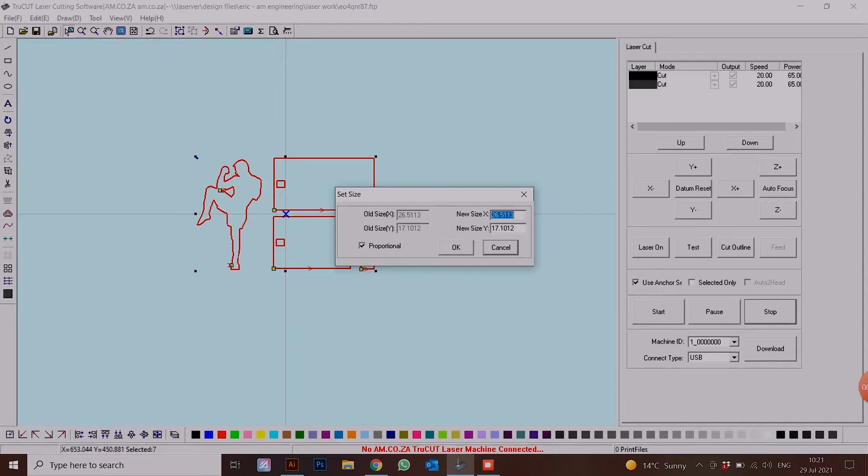Now since we changed the size of the whole thing, we need to check what the base plate size is going to be, to see if that's going to be big enough for us. X being 85 and our Y being 45, and we just got to keep in mind that our phone has to be smaller than the size of the stand we're cutting today.

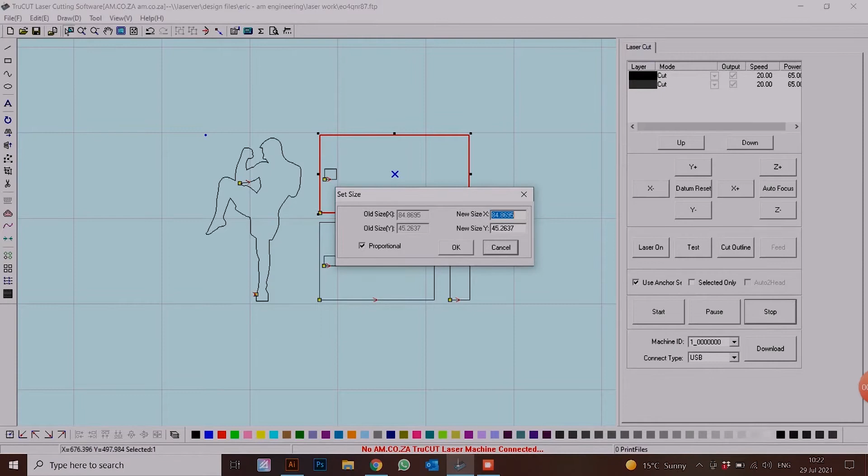I feel like 85 and 45 aren't going to be big enough, especially for my phone, so I'm going to make it bigger. Keep in mind you need to make it proportionately bigger, so I'll change the size to 80 instead of 85 wide. I feel like that will fit my phone better, just keep in mind to keep the size proportional.

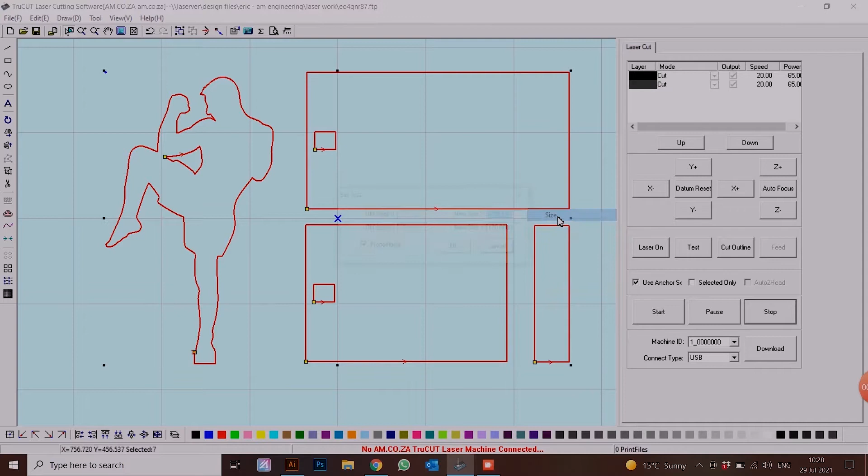Once I've seen the size that I need, I'm going to keep making the entire thing bigger until I get the size I'm looking for on the base plate, which I wanted 80 wide, and there we have it, just under 80, which will work perfectly fine.

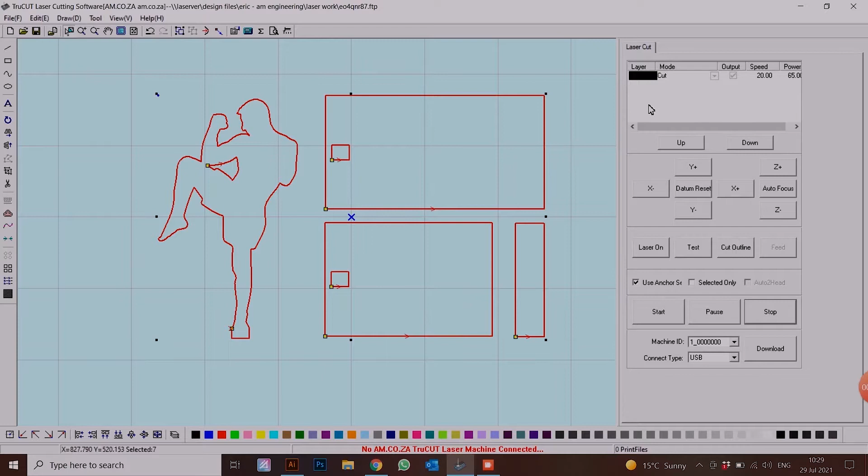From there we need to make sure we have all our layers selected, and our layers on the top right, as you can see there's two different colors, which is not what we need. We only need one color, so I'm going to select all of them to be black. So now it's all one layer.

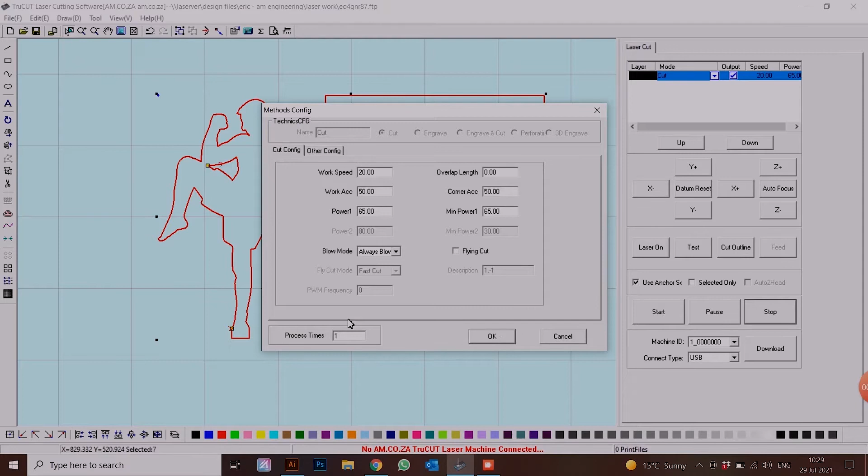From there we're going to be doing cutting, so I just want to make sure our speed is 20, which is perfectly fine for me. Our work accuracy stays 50 and my power stays 65. I'm using a 100-watt tube. Your settings may vary, you'll have to tinker with your settings. Once we've adjusted our settings and made sure our process is 1, we're going to say OK, and from there we are ready to go.

We can now select it again and either download it or start the job while it's connected to our cutter.

Now that the artwork's done and it's all set up, we can now go over to the cutter and start our job.

We're here at our laser, and now that we are here we can set up our media. We just need to do our head adjustment. Once we've done that, we're going to line up our head and then we can push start on our program. So let's get to it.

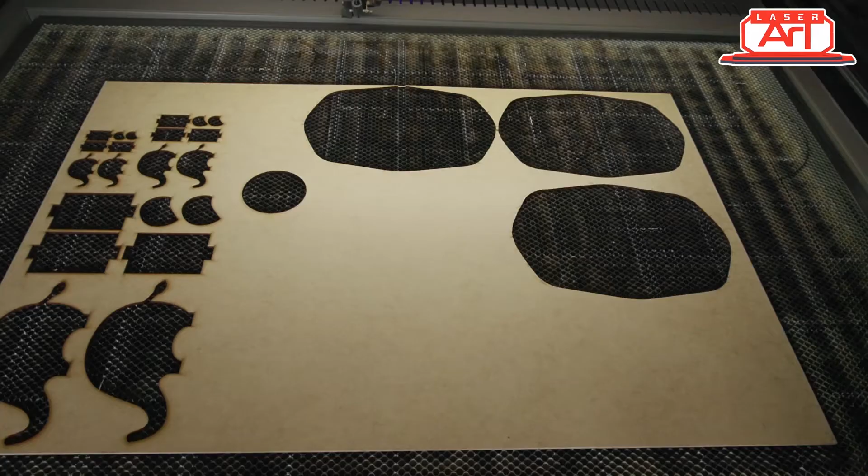Now that that's done, we can align where we want to start cutting. It's just going to be a generalized area, and I'd like to use this open space over here. So let's quickly go to our program, download it to our laser, and then we can push start.

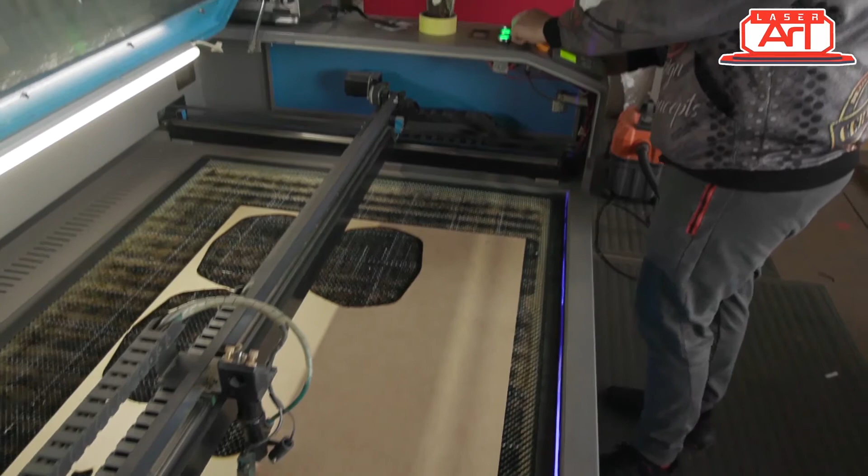Okay, we're going to let that save.

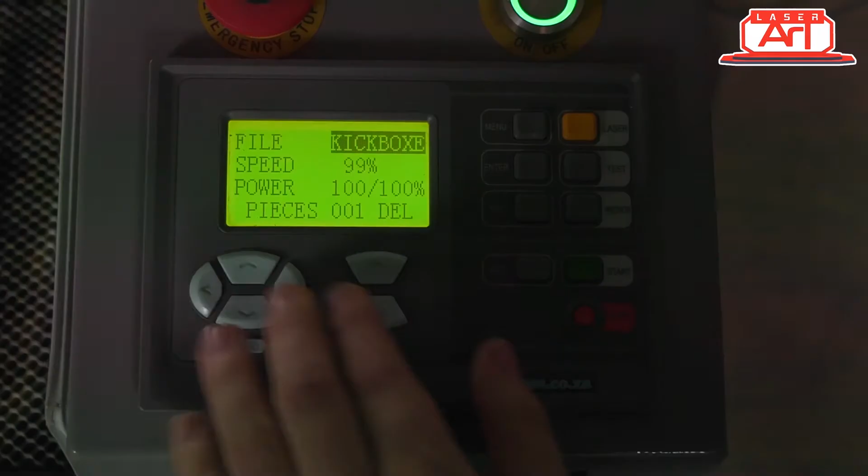Now we can head on over to our control panel, select our design, and we can start. Make sure that everything is on 100.

I just want to make sure that the area I'm going to be cutting is actually in the open space, and that I'm not going to cut off the sheet or anywhere I've cut before. So I'm going to quickly test that area to make sure that's exactly where I want it.

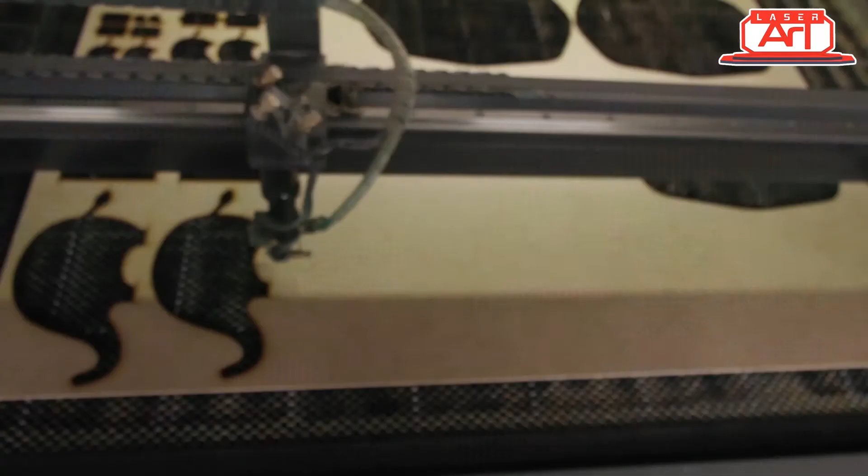I'm happy with it, it's going to be fine. We can put our extractor fan on and we can start.

Now that that's cut, we can take it out of our laser cutter and go assemble it. So let's do it.

The final stage is putting this thing together, and there are many ways you can do this, but today I'm going to use wood glue. That's basically it. After it's dried, you can sand it down and varnish it, but because this is just a test to show you what you can do, we're not going to do anything extra, we're just putting it together.

So let's do it. I'm just going to put down a little bit of glue onto the masking tape I put here, simply because I don't want it to go on my table. I've also got myself a little piece of acrylic.

The first stage, I'm going to take my base plate and line up the second piece and glue it there. So let's do that. You can give yourself a generous amount of glue, or you can use a little bit. Wood glue is very versatile, it'll stick with just a little bit, you don't have to use too much.

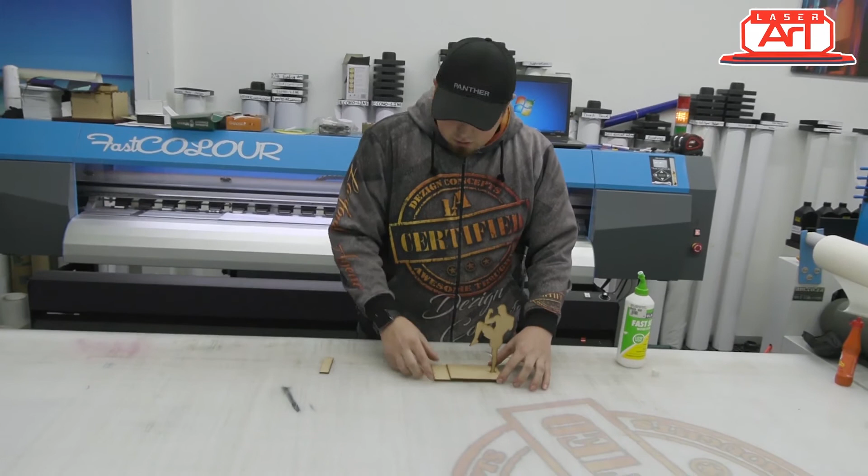Next stage is to glue on this piece here, so that we have a space where our phone sits nicely in there.

There we go, all the pieces have been put together. We just need this to dry for at least 5 to 10 minutes, and then we can test out our product. So, see you just now.

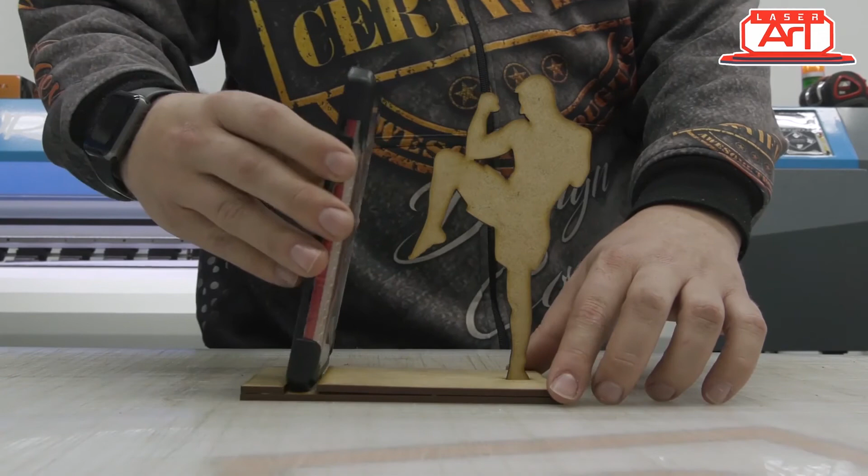So there you go guys, another simple design done.